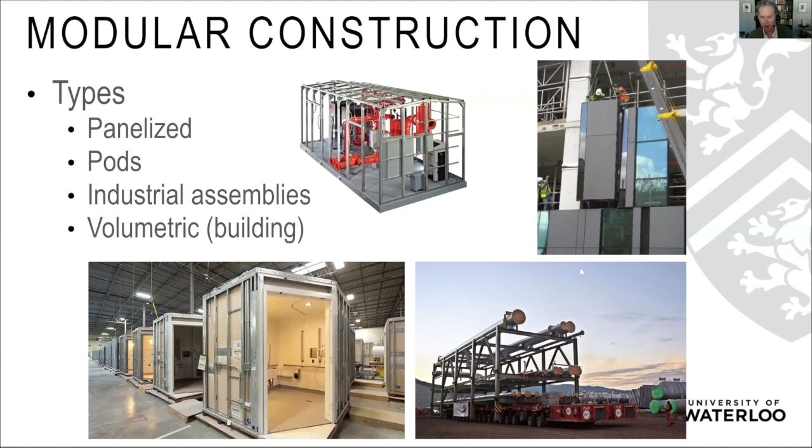In the past, I worked mostly on the types of industrial skids and large modules that you see in the top left and the bottom right, and more recently on the sorts of building type modules that you see in the bottom left and the top right, exterior panels and so on.

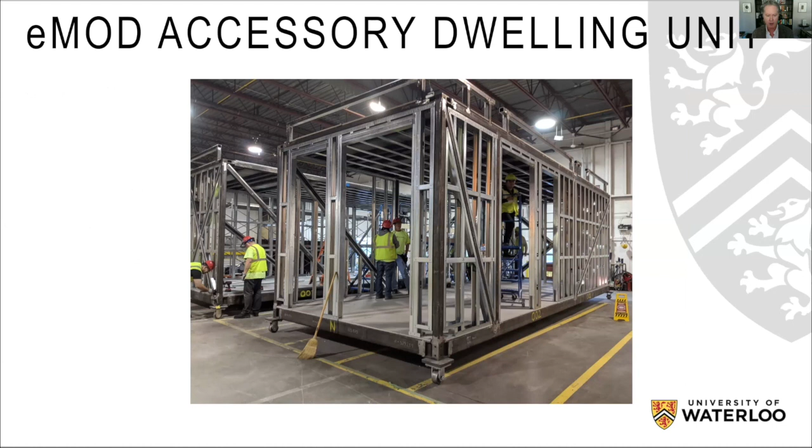This is a project with Edge Architects and Zed Modular, and a student of mine who's actually graduated now, Chris Rausch, using a specific kind of technology. One of the things we were looking at on this project and related ones was how we could produce modules that were dimensionally very tightly made, very precision fabricated, so we had a product that was actually higher quality than something we might stick build.

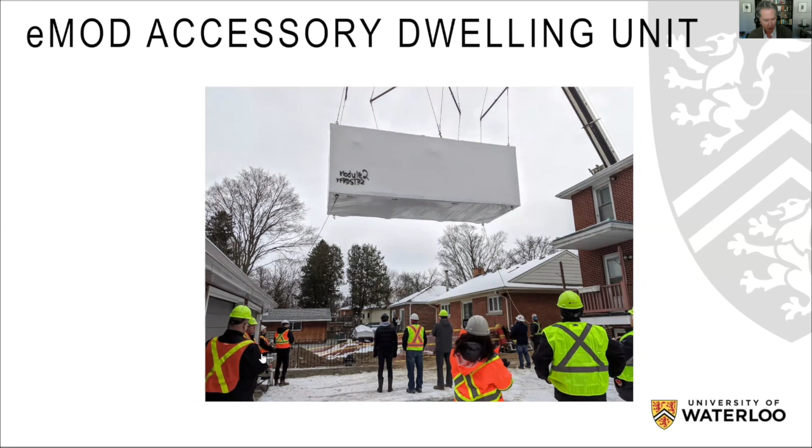Just wanted to show where this went. It went behind a house in Kitchener, with a prismatic boom crane lifting one of the units in. Chris shared a very nice video with me - I won't show the whole thing, but there's the architect's rendering, a pretty nice view, and a beautiful finish quality on the inside as well.

So I'm just going to leap through this. One of the big issues around modularization and prefabrication over the years, and why they weren't adopted as much as they might have been, but are now being adopted very rapidly, is that there were tolerance considerations. Things tended to often not fit, and that created events or incidents on site, creating structural, aesthetic, functionality, and constructability risks and serious rework events.

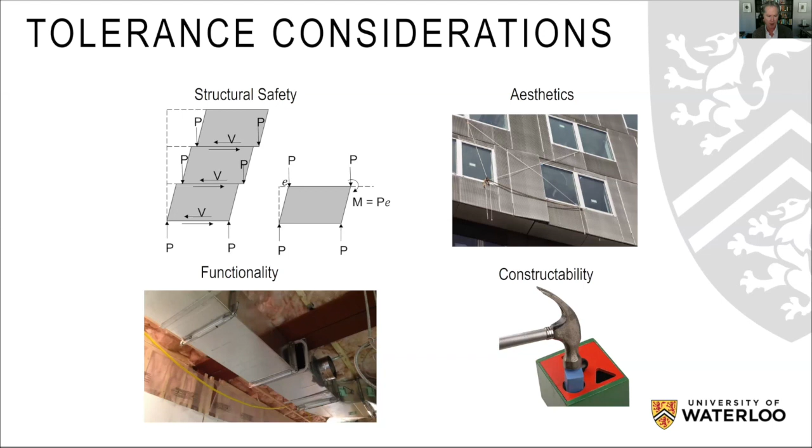So this is something we can use laser scanning to work on. You can use it in a very sophisticated engineering approach, with some sophisticated software tools that typically go with the hardware you buy from Faro and other scanners. You can really get some insight into how you can improve processes in your fab shop or your modularization yard.

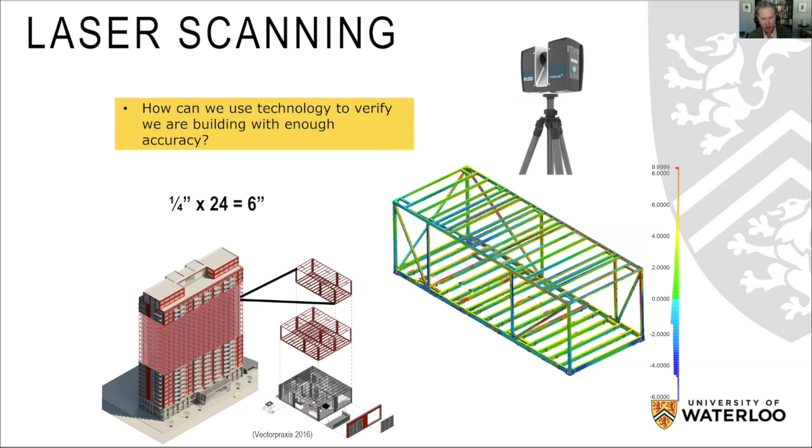You can also do some pretty cool things like scan a frame and then scan the concrete slabs that you're going to drop into those openings in the frame, and decide ahead of time which ones are going to fit best using virtual planning and fitting algorithms, which we've done a lot of work on over the years. So that's kind of cool.

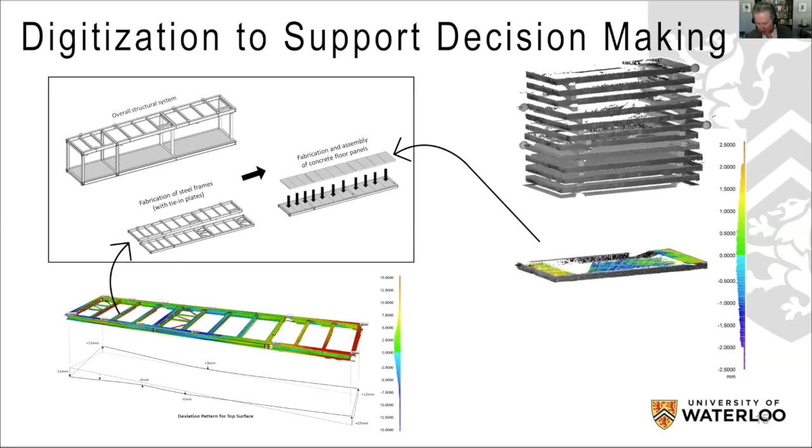But moving to what is really the theme of today's chat: sometimes you've improved the processes all you can. You've applied lean, you've done other stuff. And you could bring in a high dollar metrology team, engineering team to give you some insights, but you'd really like to come up with a simpler solution.

We still have this problem in the prefabrication sector that we ship stuff and it doesn't fit, and it costs tens of billions of dollars a year around the world. We think it doesn't fit, and these processes aren't working perfectly, because you've either got the manual measurement tools for these complex dimensions that we've always used - the fitters and welders and steel workers. They work most of the time pretty well, but not always, and that's the problem.

So our objective in our research program was to make tools that the craft worker could use, or the site superintendent could use - somebody right at the work face - that was so simple it'd be like an iPhone or an iPad. We wanted these tools to work remotely, and we wanted them to facilitate better collaboration up and down the supply chain between the stakeholders.

So this involved - we've always got a stream of research, but this particular one involved, I would say, three basic steps. So the first step was to find some cool algorithms.

We've looked into things like fully convolutional neural networks on point clouds, principal component analysis, iterative closest point - all these fancy algorithms. But they allow you to do things like scan a scene and pull out a particular object and the points associated with that object, and then do stuff with that point cloud.

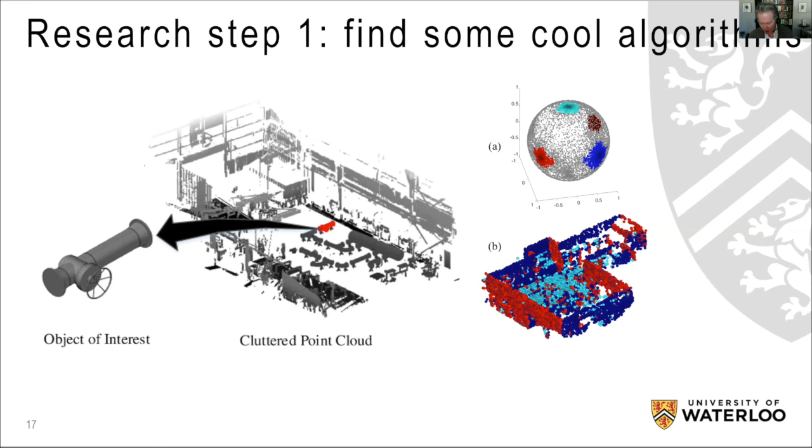Then the second step was - so that's all fancy, we can do cool stuff in the lab and demonstrate all that sophistication, but we really wanted something simple that you could use on something like an iPad. We wanted it to help with simple things like two-sided isometrics, visualizing an isometric, being able to zoom in, get information, cut sheets, and then visualize what it was you were trying to build. So that was the second step.

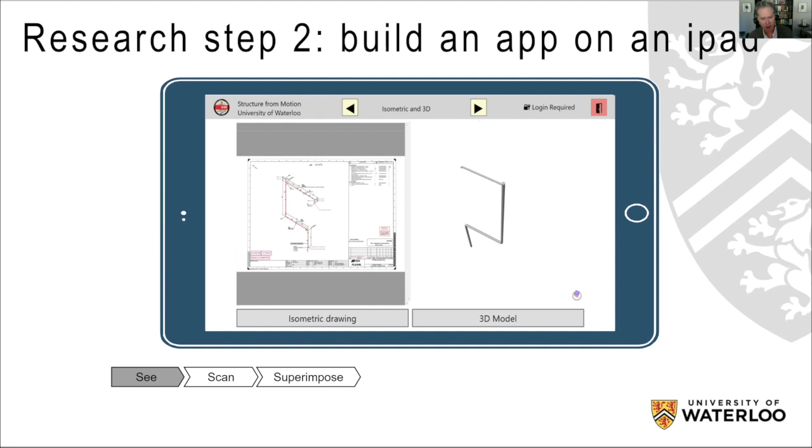And then the third step was, you got to validate all that. So in this particular case, we did about 60 experiments with those pieces of rubber or PVC tubing you see below you, and quick connect. We used the little iPad with the little scanner on it that you see, the 3D scanner.

And we used the app that we developed, and we just tested with real fitters and real welders: could you put this fancy spool together quicker if you had this sort of an app? And could you do it more correctly, more often, with less interim kind of rework?

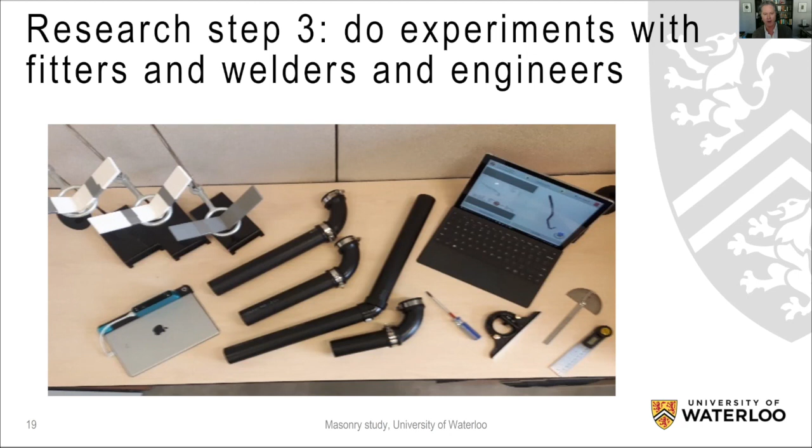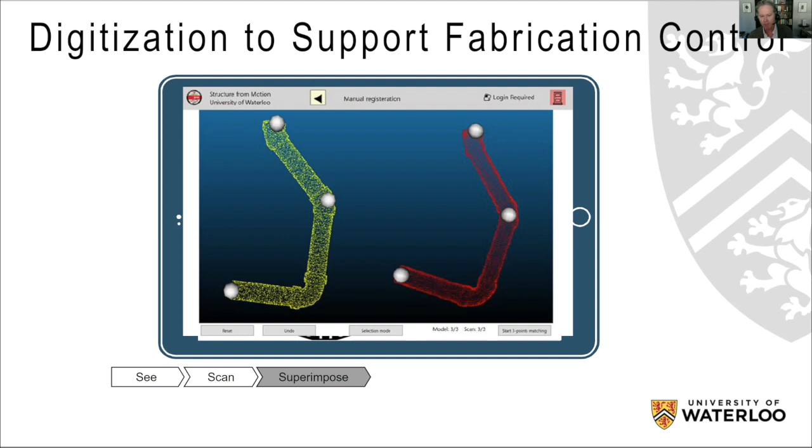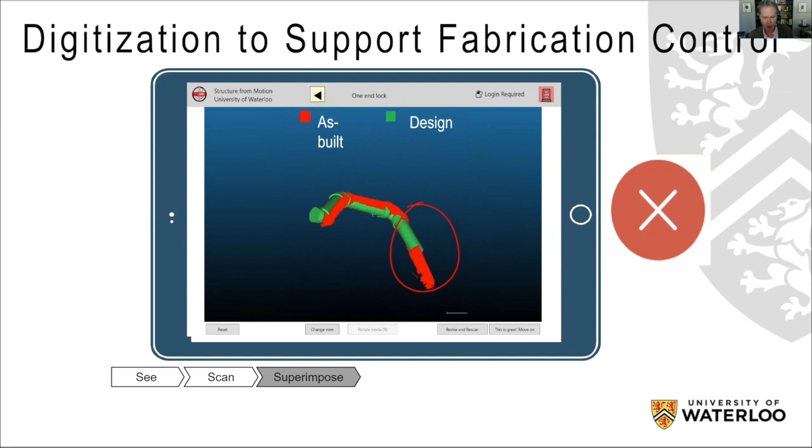It came up with not an app, but a web-based software as a service solution with a number of products. I'm just going to try to show how it works. The company is called Glove Systems.

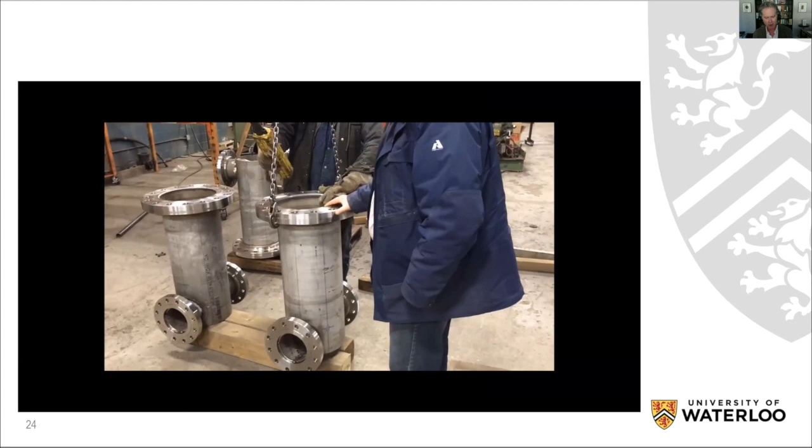Now we fast forwarded, obviously we don't work this fast in real life. Looks like a 1920s movie. But you've got to get the things that you want to scan in the fab shop or the site. You scan them, you get the design information together. So you scan these things from different angles.

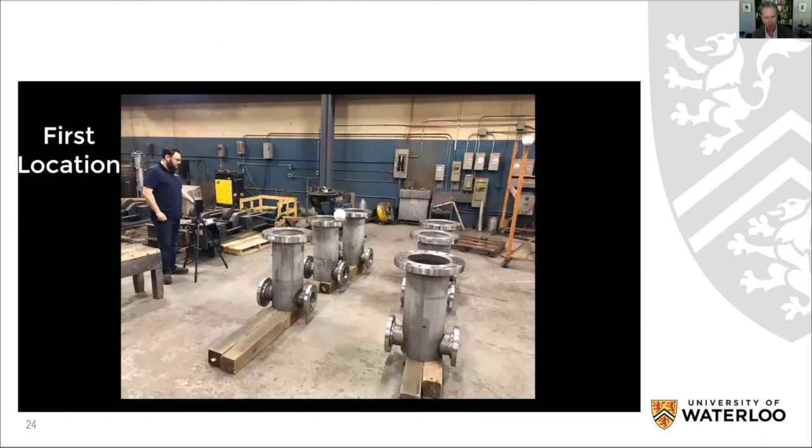You build up some point cloud 3D information of what you've built there. Your software puts all that together. You don't have to worry about that. And then what you do is you superimpose the design and what you've built. So we represent them both with point clouds, and the superimposition is really easy.

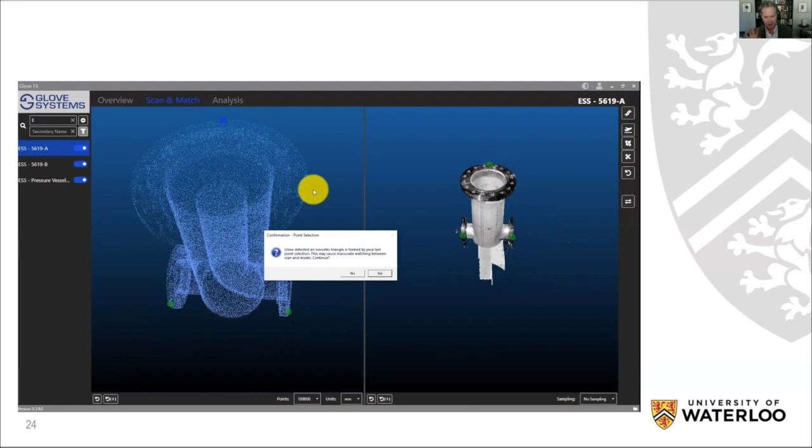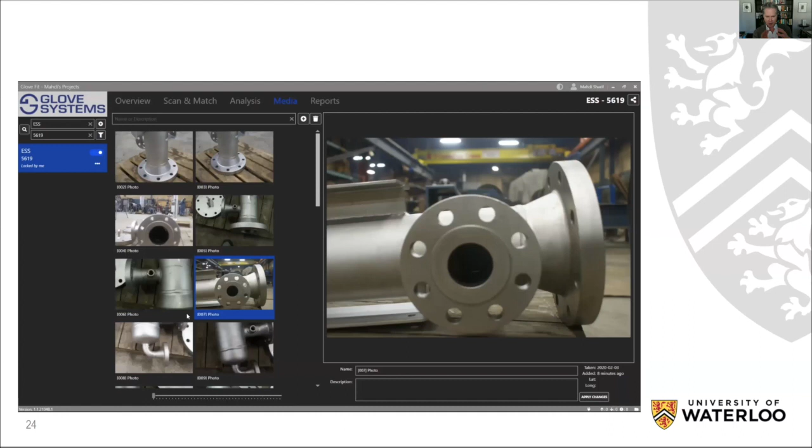You just have to click on a couple places on each one roughly where, and then you get a heat map. The heat map is basically a way of showing where you're deviating and where you're perfect, and that can be very useful for a lot of things. But you don't want to share just a heat map. You want to share photographs. You want to share reports and stuff like that. And you want to be able to share that on a secure website as well.

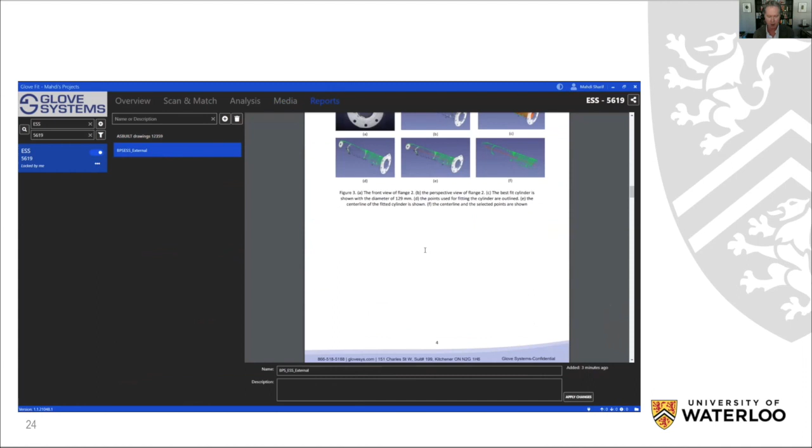So there's a series of related tools that allowed, either from a fabricator or constructor's perspective or an owner's perspective, to share this information securely and view it together collaboratively. I think this is just showing that you cut and paste a website that's generated. Everybody gets on that website. You can all play with it. Everything's synchronized, and you can visualize before you go to the next step in your supply chain.

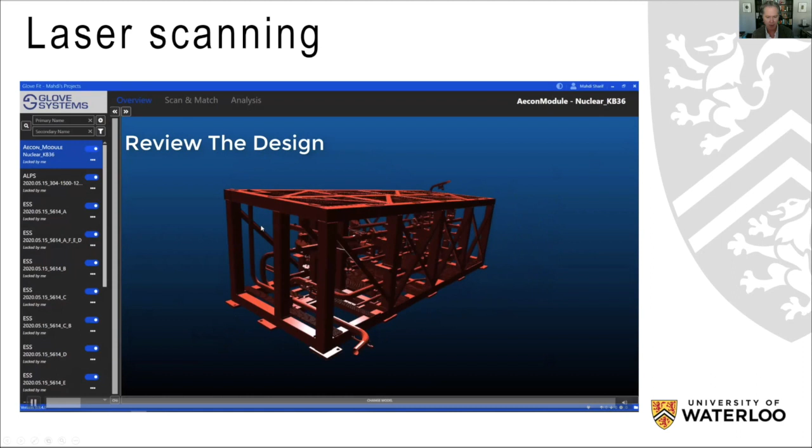Okay, so according to my schedule, I'm going to be 1 minute over, but not too bad. I wanted to show you what this all looks like for a more, larger scale module as well. So this is, I think, a large nuclear plant module. On the right, you have the 3D scan. On the left, you have the 3D model, both rendered as point clouds.

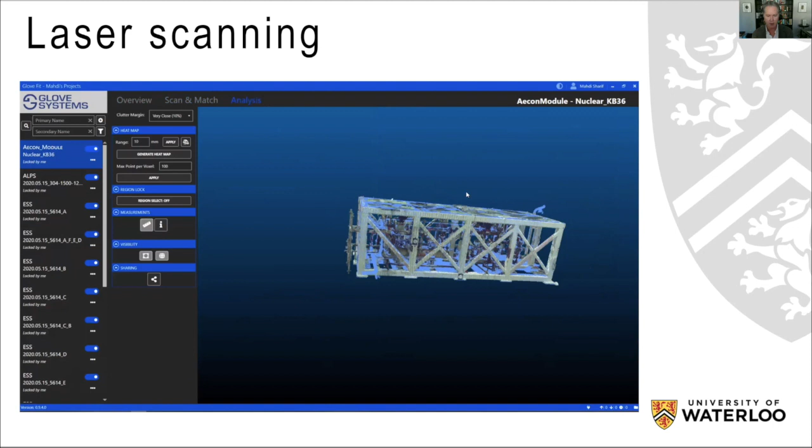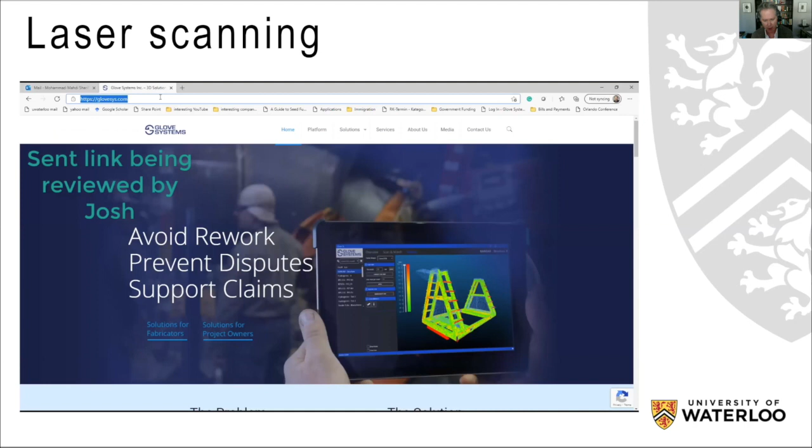Here you've overlaid them, and you see with the heat map that you got a pipe way out of position. So you share that with one of the stakeholders in your supply chain. Again, you do that over the internet. It does take a few seconds, but once you've shared it, everybody has their own version that they can manipulate, or you could share your screen and talk about it together. So that's basically how it works. And this is just showing what it looks like when you're sharing it over the internet.

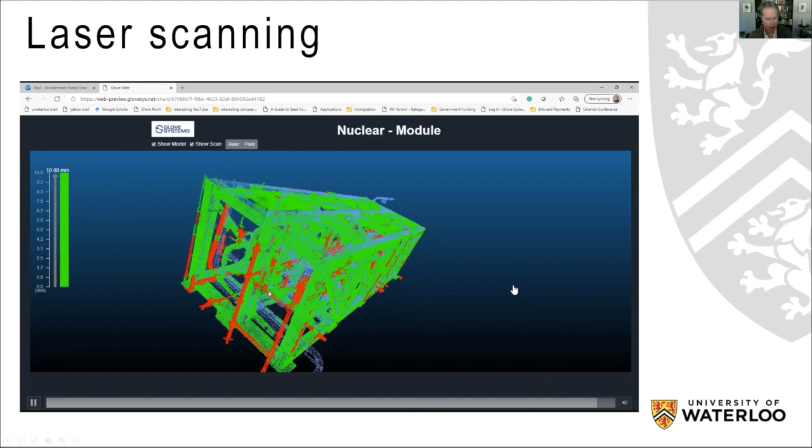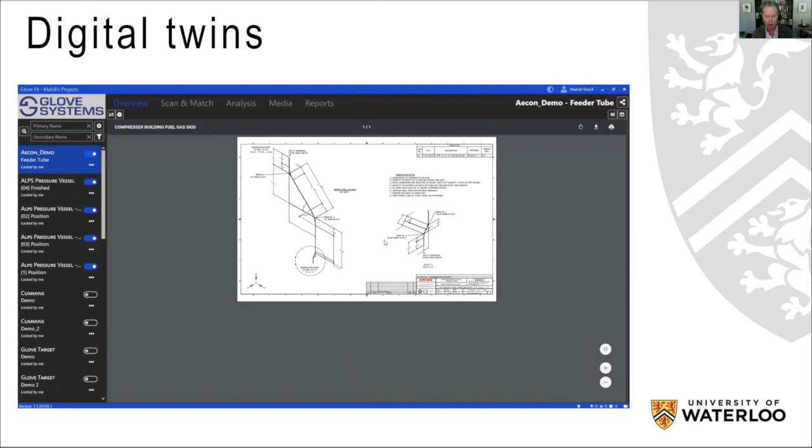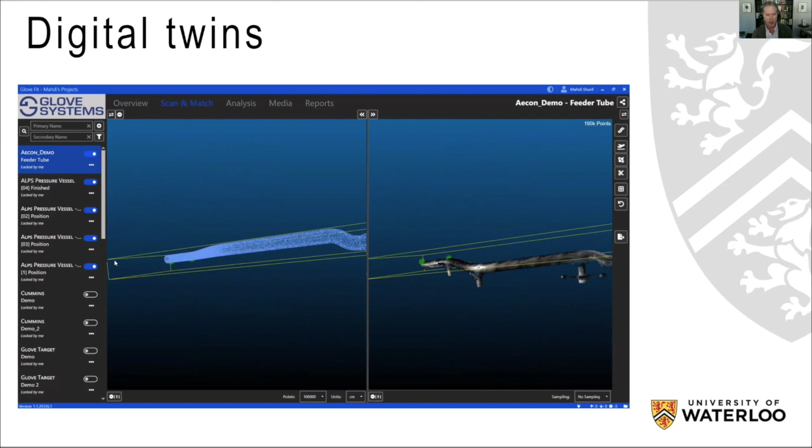Okay, so I just wanted to share this one as well. These are pretty short little video clips. This one is showing what it looks like if you don't have a big module, you just have like a pipe spool or a steel assembly or something. So you're using this tool both in the fab shop to do the fabrication, to do the checking at various QC points. You could even do it to do the checking of the tack welding or the fit up before you actually do the full welding.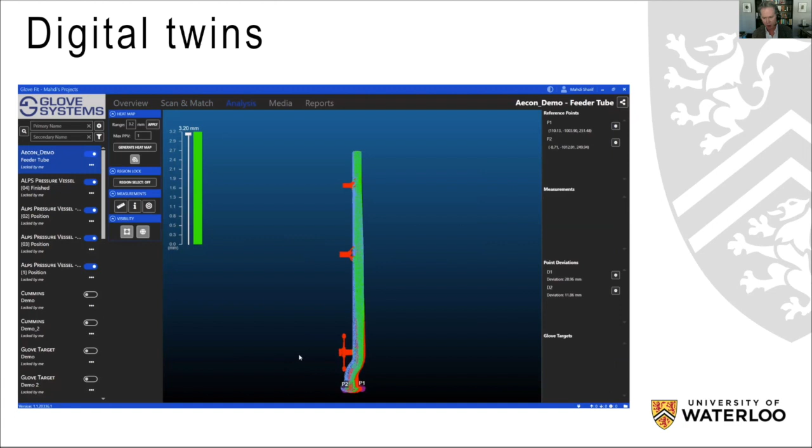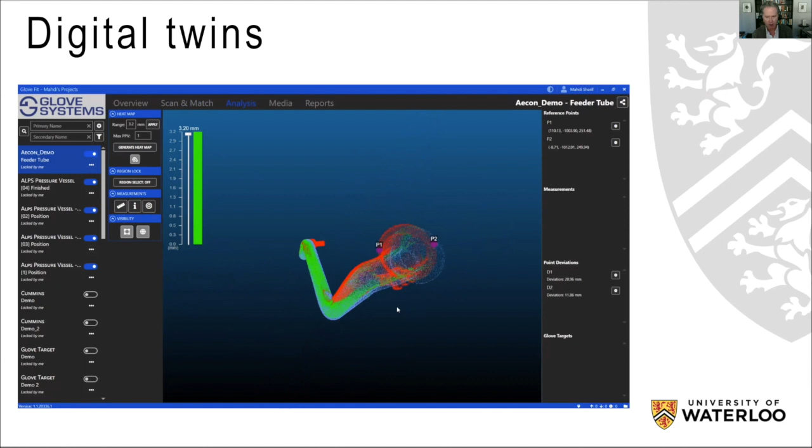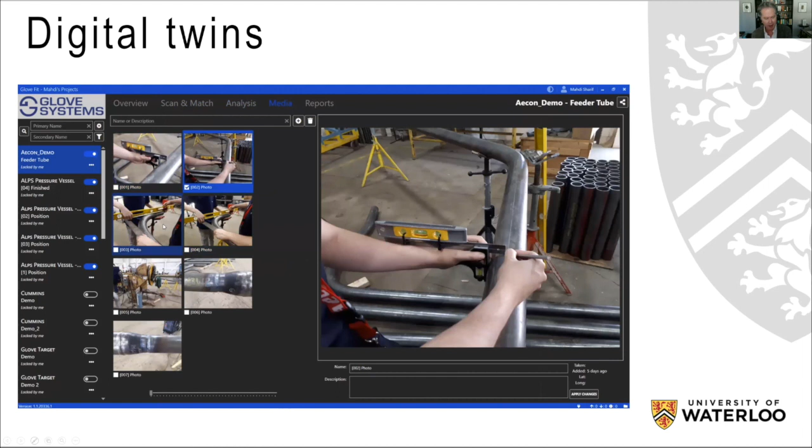And then it can show in this particular case that there was a deviation, and it can show you, I think in the bottom right, the precise number of millimeters of deviation, and then you have to decide whether that fits the spec or not. Whether it does or doesn't, then you have a different path in your workflow. One would be that you might share some images of the work and your measurements. You might share some reports, some welding records and things like that, and inspection records.

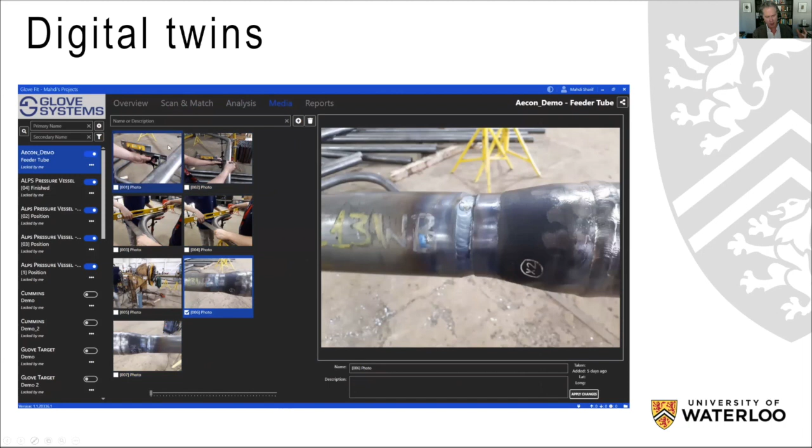And you'd kind of want that to go like a little digital passport along with this thing that you'd fabricated, and be able to be shared up and down the supply chain. So I'm going to move on.

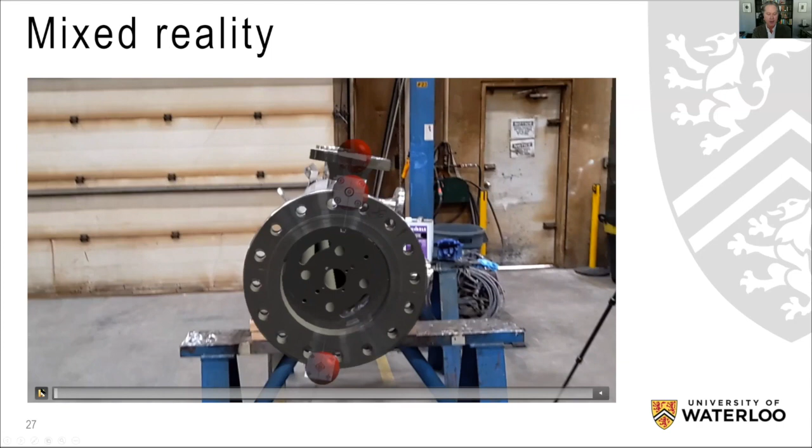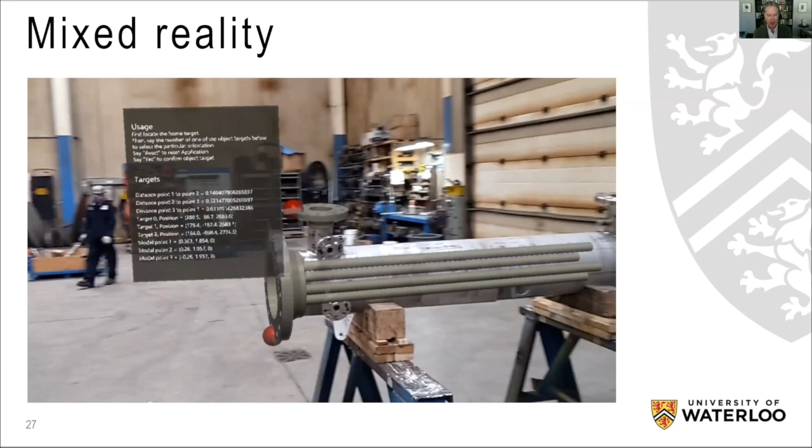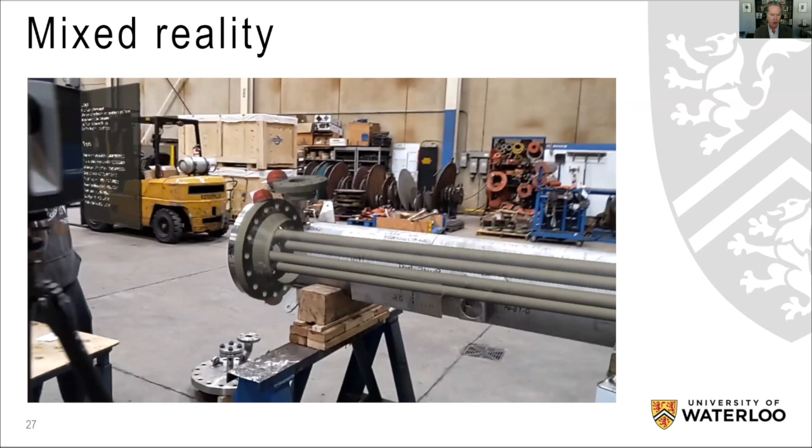This is the last thing you could do with that sort of set of tools, showing a future app. This is the idea of being able to visualize how things are going to fit before you put them together, where you've got something you fabricated or designed, like that magnetic rod array on the left, and you've got the thing you fabricated that you're going to put it into, and you want to know if you bolt it flush on the flanges there, whether it's going to fit right.

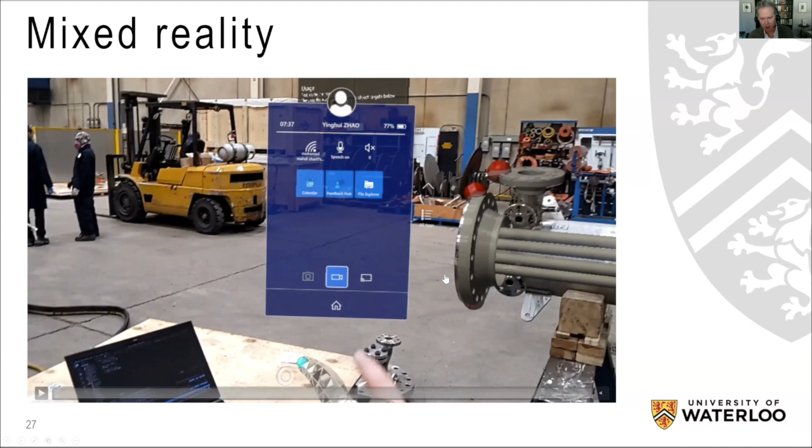Craft workers were going to use it, and they're going to use it to avoid undocumented rework and just make sure we did everything right the first time, and that was going to improve productivity. And as we got further into our understanding of all this stuff, we realized this was also pretty valuable.

If you could share it over the internet, over the cloud, as software as a service, it could be useful for supply chain management, supply chain visibility. We also understood that early adopters really saw it more as a risk reducer.

So that you're not shipping stuff to the site and having it shipped back, you're not having arguments and claims, you're basically knowing for sure that what you shipped actually fits all the specs. And in a sense, that took us to the next evolution of understanding what we had, which was a trust-building tool. That if you have remote fabrication sites and a supply chain that's broadly distributed, how can you build up trust that what's being done is being done right, and what you're getting was done right.